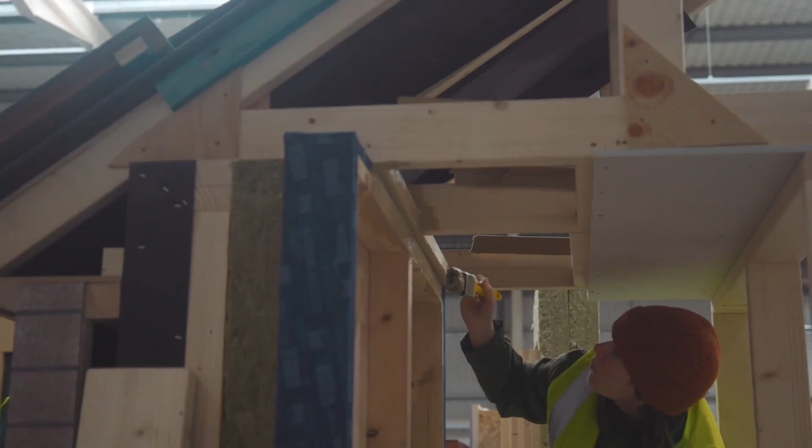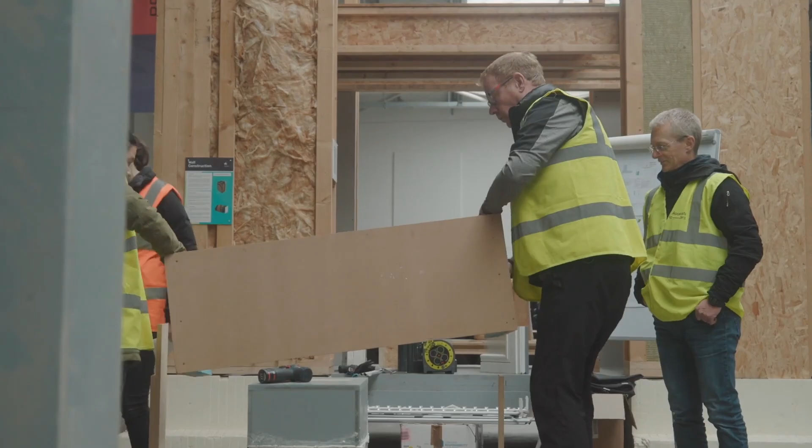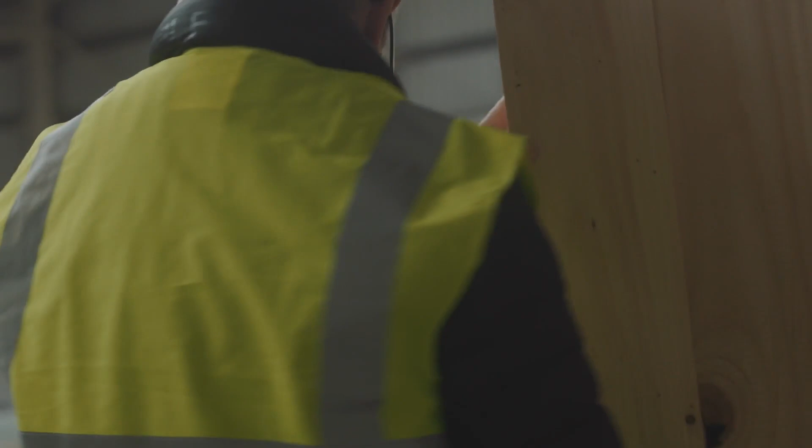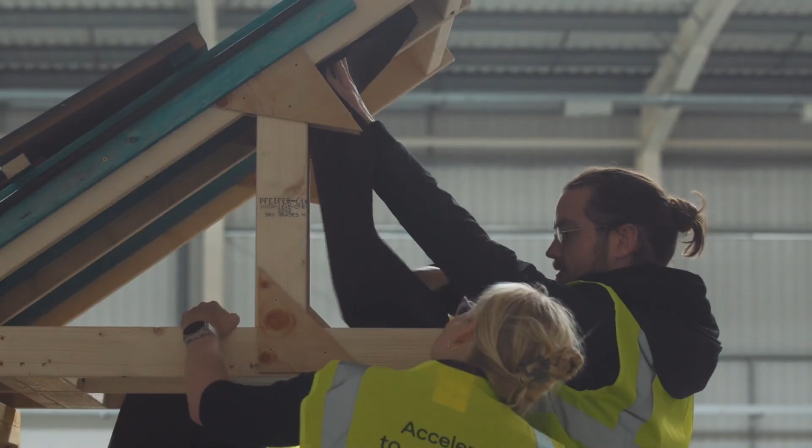This course is a Passivhaus practical course that BEST have developed in partnership with Coaction. They discovered that there was a bit of a practical gap in terms of application between people that were coming out the end as a qualified designer or tradesperson and their actual on-site experience. So what they've tried to do is plug the gap to allow people to accelerate that learning, to come to us and spend the day with us to better understand how much the sequencing impacts and how they should design detailing that is easier to build, and they understand the sequencing at that stage so that they get less problems on passive houses on site.

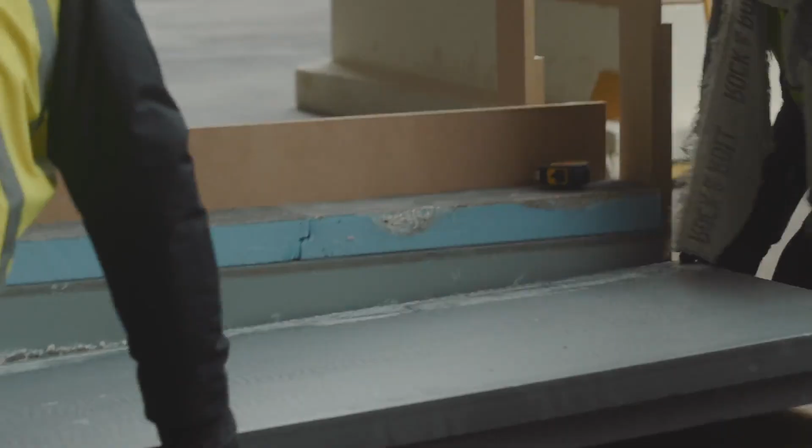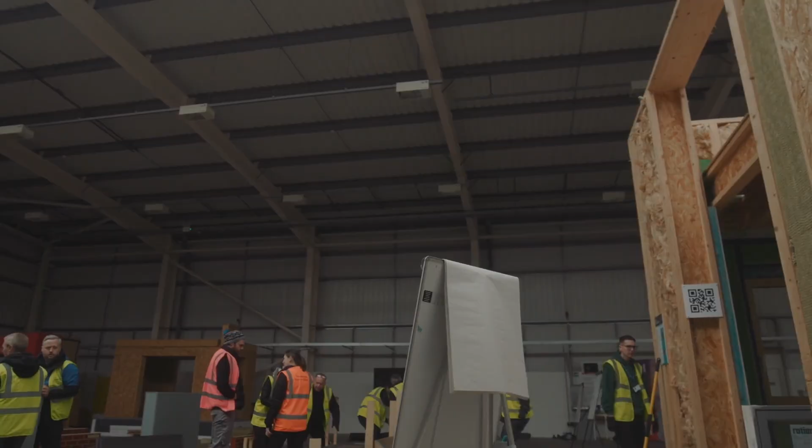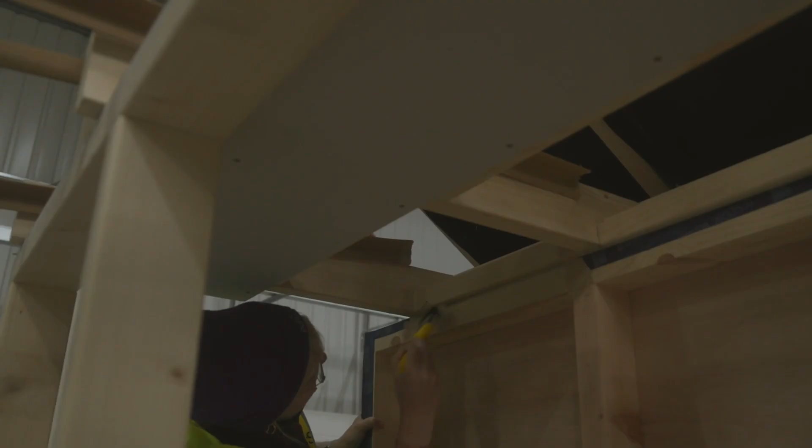So if we're going to mitigate climate change, then we really need to make sure that we're upskilling the industry. This training's here really to provide that valuable transition between design and construction. The idea that's been set up on this training is that we can amalgamate designers and contractors, have them in the same place, that we can actually engage in discussion, understand where design impacts on buildability, essentially develop an understanding of designing for buildability. But how do we communicate that? So the best way to do that is to get hands-on physical activities, and the facility here at BEST allows us to actually bring those teams together.

And hopefully that worked well, and it gives you a bit of an insight into the training and where it's located and the activity that happens within it. So just a little bit of background to the project. We've been delivering training in low carbon since 2021, and the training has actually evolved as we've really noticed the skills that are required and how we've been able to adapt the program.

So originally we looked at Passivhaus training rigs, and we've really focused on air tightness, but we know that this has given a bit of awareness, but it's not really hitting some critical points that the industry need to upskill. We then collaborated with Coaction and we developed this course in partnership together. So Rupert and Kate will go into more detail and also how they're instrumental to the programme.

But really, when we think about the Passivhaus Practical training, as you could see in the video, it's really about collaboration, breaking down silos, working together, understanding the key benefits of practical training. We know that the industry is moving away from one-off passive house projects, and low carbon, low energy and high performing buildings are kind of critical to everyone within the built environment, obviously to certain degrees and extent. We have local authorities, housing associations, developers, public and private commissioners specifying passive house or working on passive house low energy, high performance principles for new build and retrofit.

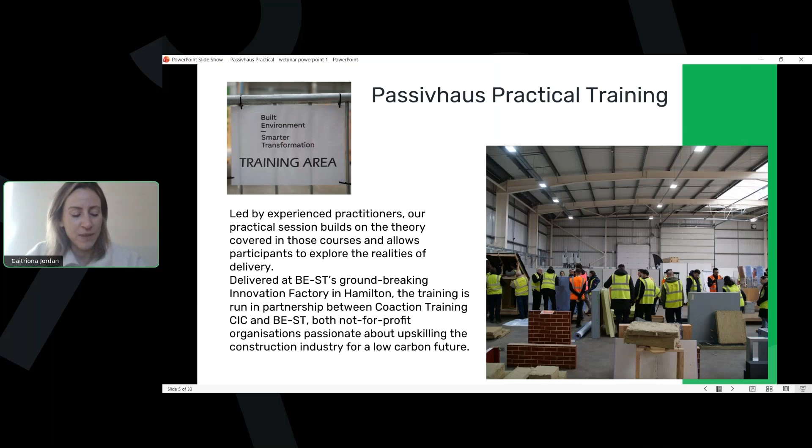So the demand has definitely grown, and there's a need to ensure that the upskilling is taking place as well. The Passivhaus practical skills really close that gap between theory and real construction. It's the intermediary between both of those activities, and the Passivhaus Practical is a one-day course that addresses a whole range of activities, from installing air tightness membranes, identifying thermal bridges, the insulation requirements, building with confidence, competency, and really reducing mistakes and learning in a safe environment where you can make mistakes.

The programme is really addressing all needs. So for example, tier 1s, tier 2 contractors, architects, consultants, tradespeople, and also we're really starting to ready ourselves for the legislation into whatever the Passivhaus Scottish equivalency will be.

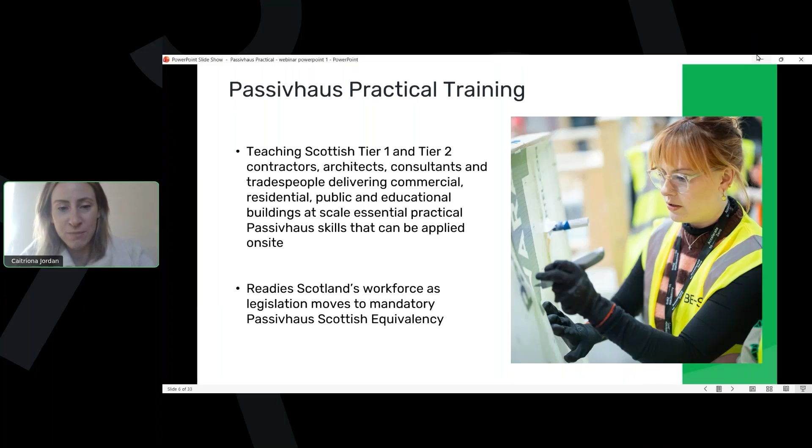My background experience in construction's over 20 years, but I've been focusing on fabric first efficiency now for more than 10 years. The importance of this training, I think, especially at this time, is that we need to transition from what looks good on paper to actual physical reality. So next slide, please, Caitriona.

Thanks. So what does that look like, and why should you attend? Well, if you've done any of the theory courses, or if you're new to it, what we're used to in the industry is designing things to a particular standard, whether it's SAP or Passive House. And in theory, that works well. We can see that in the modelling or on paper as being effective. What we need to do is actually transition that to reality.

So what this course is trying to do is look at that point between pre-construction and construction, and see how we can actually make sure that the design intent is translated into construction reality. So we're mitigating the performance gap, and what we don't want is exactly what you see on the right, where everyone thinks it's working one way, and the reality is that we're getting quite a distinct margin of additional performance loss. Okay, next slide, thanks.

So I've added in this little quote here. Sorry, if you can go back one there, Caitriona. Yeah, a little quote here. So it's interesting just seeing the culture of the industry, and it's changing, it has to change. And we find sometimes that some of the resistance here is possibly from some of the most experienced people in the industry in terms of construction, that we're bringing in something new, we're adding another layer to the context, and that understanding needs to actually translate from a management level down to people on the tools. So the course here gives us that option to actually move between different roles.

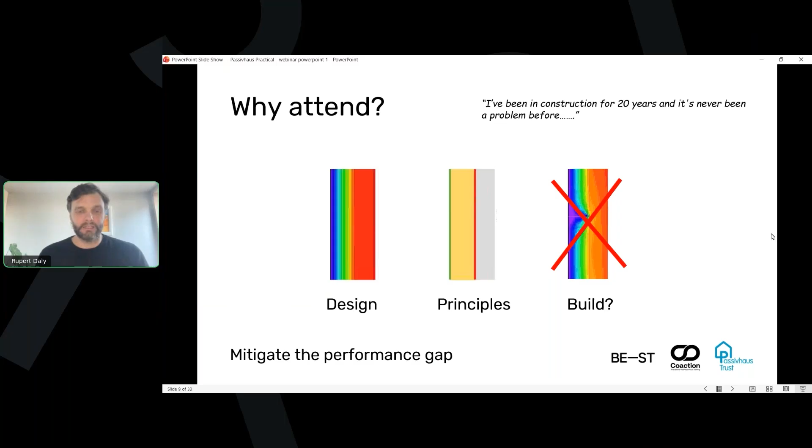Okay, next slide, thanks. Okay, so the benefits: who gains from this training, apart from the end building user? It's really open to a wide range. On the course we've been running now for a good couple of years, we've got designers coming in who are getting more upskilled in understanding fabric first energy efficiency in buildings, and wanting to know how to translate what's on paper into a quality assured building design.

The contractors as well, various scales. We've got individual sole traders, we've got tier 1 contractors, we've got a middle ground where whole teams have come from a relatively small contractor, so that they're all understanding what they need to achieve. The best part for me, I think, is where we get engagement, where we get those conversations going. So it's great that in most of the cases we've got a selection. We've got designers and contractors bringing their own experience to the table, as well as clients, so that we're all on the same page.

And we're finding there's more interest now in companies actually using it as a team building exercise, potentially for specific projects, but also just to help with that collaboration even from the early design stage, so that people have more of an understanding of what it takes to achieve this performance. Okay, next slide.

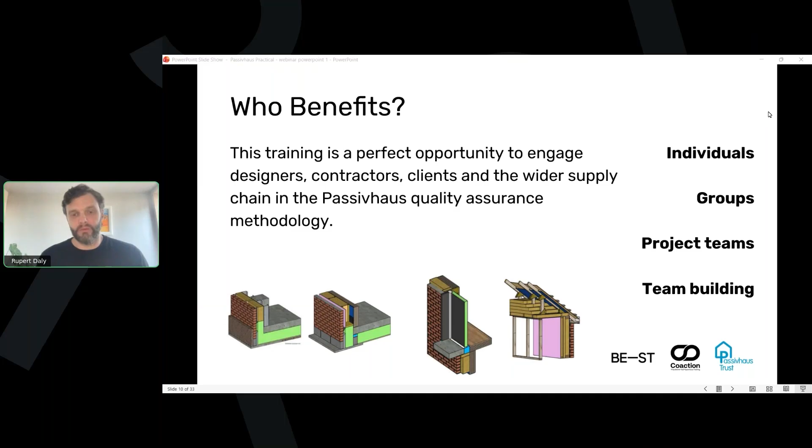Okay, so the course is structured, or the day is structured, around that knowledge transfer point in the project between the developed design, pre-construction, and getting handed over to the construction team. It's not realistic really to condense a whole construction project into a day of training.

Sorry, can you go back one? Sorry.

Into a day of training. So what we've developed is a series of detailed junction rigs to facilitate, first off, desktop planning and sequencing, and then the physical build, so we understand what's involved in the process. So when you see a detail that comes from a design team, there's a lot of information on there, but there's also other information that we need to understand that won't be explicit in that

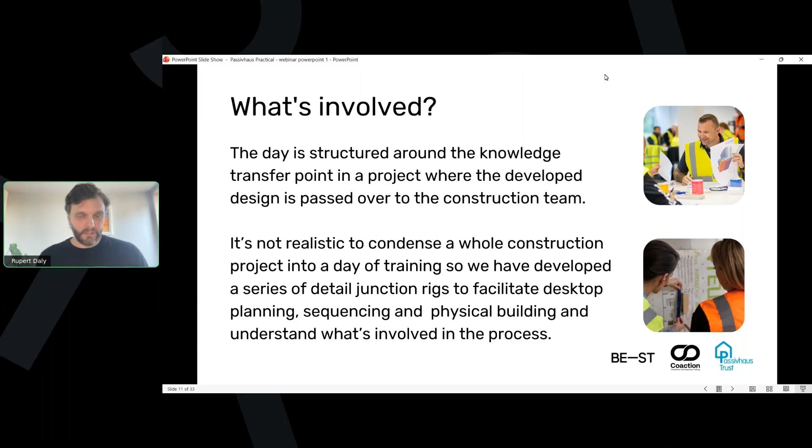detailing. And breaking down those details, understanding how things go together, what the sequence of works would be, and how we can ensure that we get the Passivhaus principles of insulation continuity and airtightness into the mix is really important. So having those different roles comes through. So next slide.

Although it's only a day, what we'll be doing is taking on different roles for short periods of time, understanding just by the actual process of the work activities and the physical build what's involved, how we can actually achieve that quality assurance that we're looking for, and also the viewpoints of different people involved in the construction.

You'll also experience the role of an ATTIC, or an airtightness and thermal integrity champion, also known as a Passivhaus champion, and how you would engage with the others in your team when we're looking at the build. Okay, next slide.

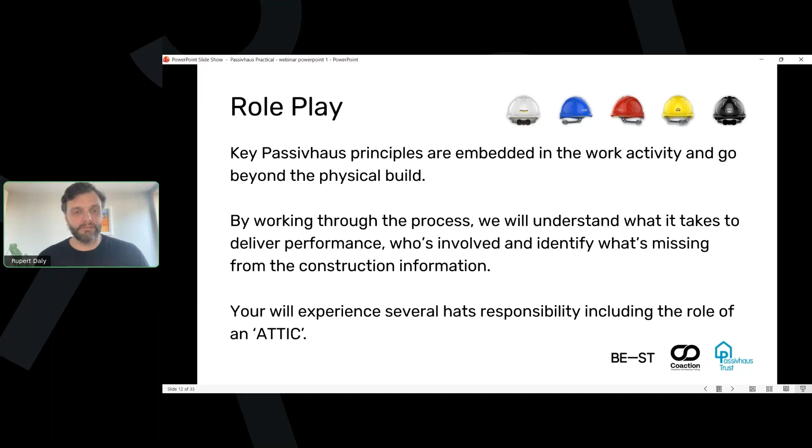Some of the outcomes then that we'll have for this: what we find is a lot of people go away having a bit more insight, if they're not in the actual construction skills part, into how difficult the details can actually make it to achieve the desired outcome.

So we're able to reinforce the understanding of designing simplicity into the construction, so we're designing for buildability. At the opposite end of that, we're seeing how we can execute the construction to perform as per the design intent. So designing for buildability and building to perform.

You're working in groups. We understand there's a requirement on all construction projects, of course, and really what we're finding is when we're actually engaging in this way, we're sharing our own experiences, and we're also embracing the culture of doing it once and doing it right.

That's implicit in doing a quality assured project, is that we have to work together on whichever side of the contract we work on. We're essentially working as one big team, and that culture is expected in projects and becomes self-evident when everyone else is engaged in the process.

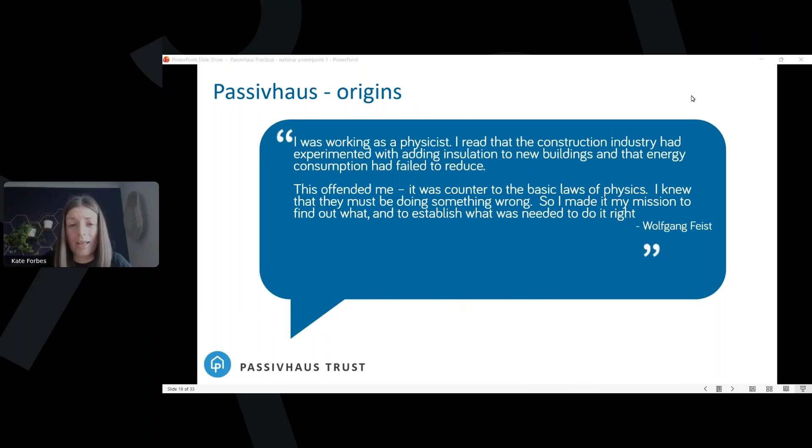A Passivhaus building, in terms of its function, is the right temperature inside, in winter and summer, and free from drafts, with excellent indoor air quality and a constant supply of fresh air. They're cheap to run with very low energy bills, and they are robust and well built, with ideally no performance gap in the construction. How do we do this? And this course helps you learn some of the skills into that. Next slide, please.

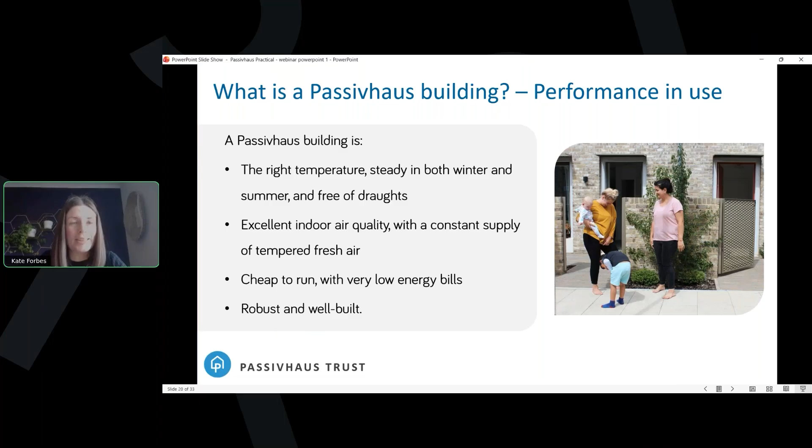So you will be aware of the 5 building principles, but there are 8 principles of a passive house integrated approach. The 5 building principles are common to most low energy buildings, and they are increased insulation or optimum insulation, air tightness, reduced thermal bridges, MVHR ventilation, and glazing.

Now, the 3 principles of passive house that you might not be aware of are principles of approach. So they are surrounding our performance and comfort criteria, the fact that the buildings are modelled in PHPP and decisions are made based on an understanding of how the building will perform in practice, and the quality assurance through Passive House certification. So with that overview, let me tell you now how each of these principles is practiced through this one-day course. If you go on to the next slide, please.

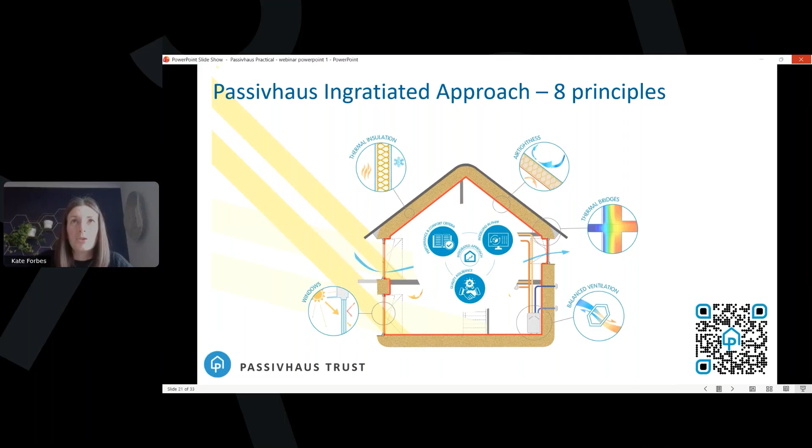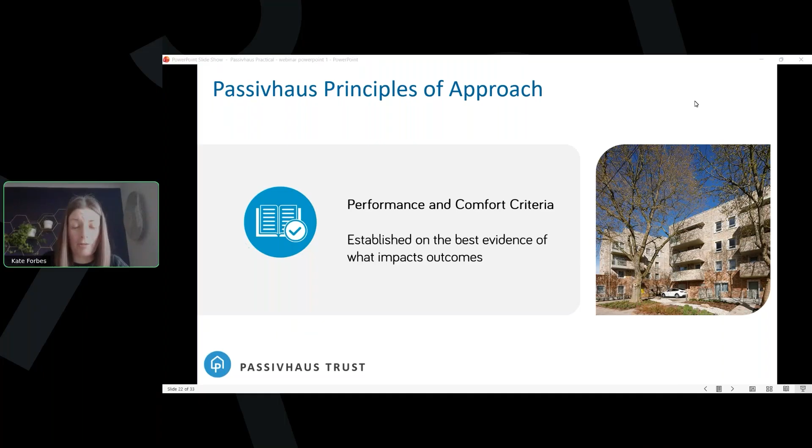So having a performance and comfort criteria, we're all used to working to a standard, even if it is building regulations. What the Passivhaus Practical course does is give you first-hand experience of working through details that have been built on actual passive house buildings. Rupert brings his personal experience to the course and allows you to understand why decisions and specifications were made in the way that they have been, and his learned experience of them.

Next slide, please. The details that we'll be working on in the Passivhaus Practical are from real life buildings that have been modelled in PHPP and constructed, which gives you a practical experience of how you would manage the substitutions on site, and challenges, how you would understand the impact of site substitutions on the PHPP modelling, and gives you a bit of a process as to how to deal with that. So some of the site expectation on substitutions of materials. Next slide, please.

The quality assurance of having Passive House certification is the key thing that helps close the performance gap in passive houses. And the PH Practical course gives you the opportunity to practice working through a detailed project on a small scale, and gives you practice taking appropriate records and photos of the build process that you would require for Passive House certification. So it starts getting the team thinking in that way: how would we go through this process and what experience we need, both from a time and resource point of view, to enable that. Next slide, please.

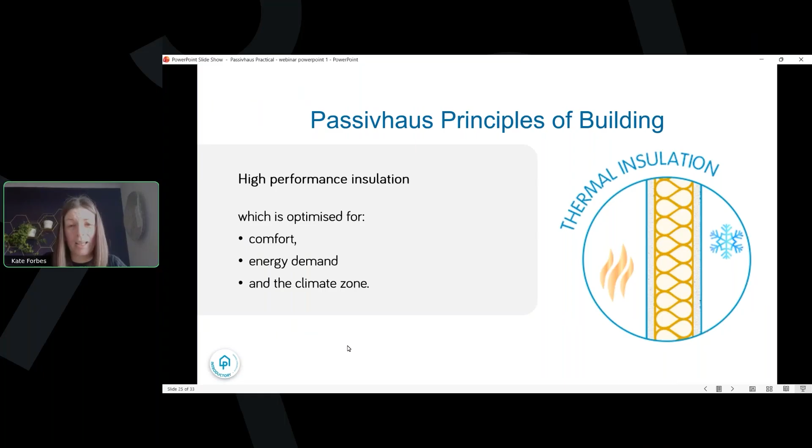Through the Passivhaus Practical course, BE-ST covers a wide range of insulations and gives you first-hand experience of cutting and installing and any of the associated challenges of each. It looks at the sequencing and the installation order and how the different approaches can impact on that installation continuity. So it supercharges that learning so that you can do that in one day with a real range of experiences. It's great for people who are either working on site or specifying to have a real in-depth knowledge of these materials.

The same is true when it comes to airtightness. The Passivhaus Practical course offers a range of airtightness materials and applications, allowing you to experiment with different products, ranges and their properties before you have to specify or order large amounts for your site.

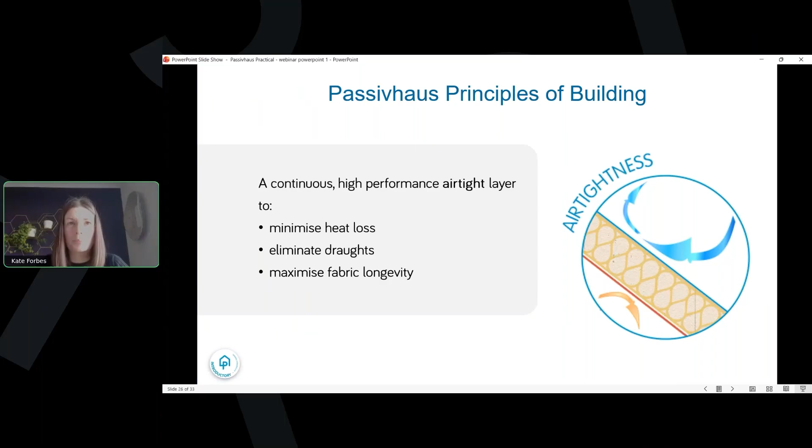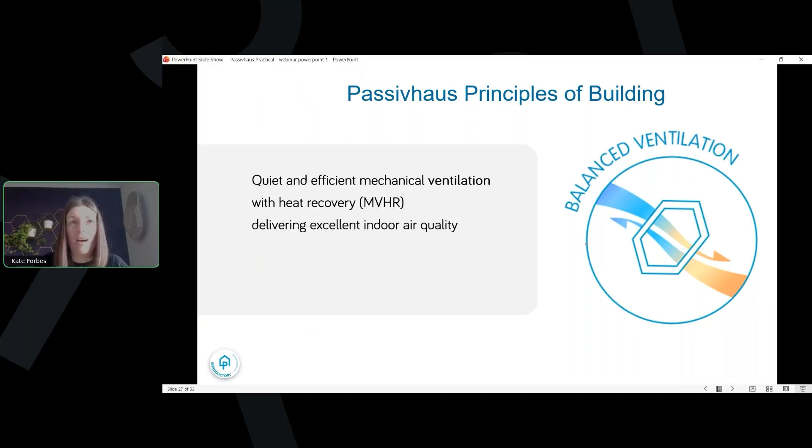The course probably focuses most heavily on building fabric, although within the BE-ST campus there is a significant display of MVHR samples, where you can expand your knowledge, and again that touchy-feely learning of an MVHR system and what the implications of these things are within your passive house build.

All of the details that are worked on in the course are designed to be as thermal bridge free as possible, and Rupert goes into detail around the decision-making process and why one element was used over another, the implications of each of them and how they were modelled within PHPP. They've all been designed to minimise thermal bridging, and there's a wide range of approaches. So you get, again, that supercharged learning in a quick and concise training.

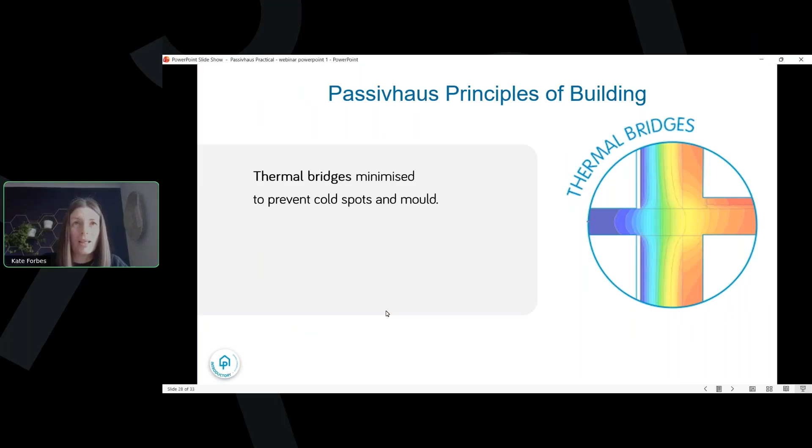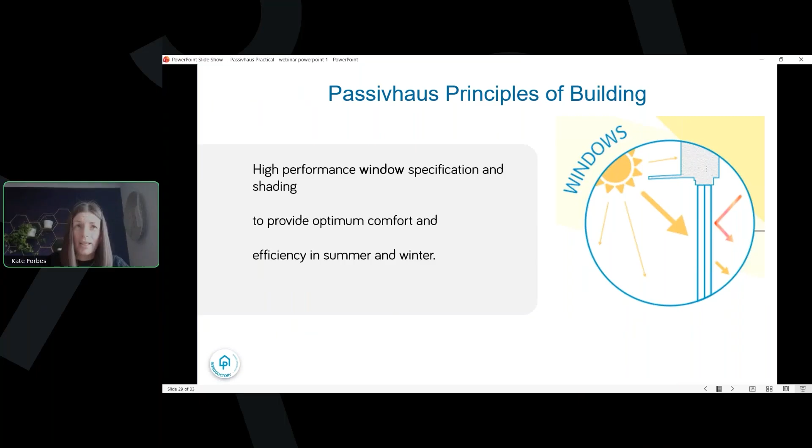In terms of our endorsement, we are very happy to endorse this course. It's been a collaboration between BEST and Coaction. Coaction and BEST are both strategic partners of Passivhaus Trust. It's been authored and delivered by experienced Coaction trainers, Rupert predominantly, and he has access to the collective knowledge and experience of the full Coaction team of industry experts. The course incorporates up-to-date learning and on-site experience from the best in the business and allows you to learn from that.